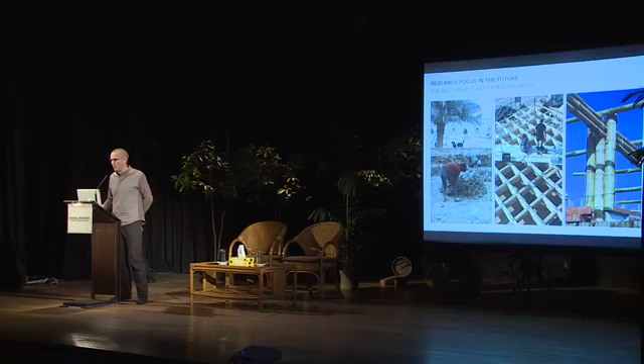These are the three main materials we think natural building is based on. I think half of the world's population lives in buildings linked to earth, built partly or totally out of earth. Bamboo has a big role as well, and in our climate zones in the northern areas, timber also plays a large part. Then we have natural stones and others, but I think the big three are earth, timber and bamboo, and that is our main research and building focus.

The office is doing quite a lot of research work. If you have questions on that, Andrea is here, she's doing our research department. The first project she came into the office with is the H-House project.

It's Healthy House, designed as part of a bigger consortium doing many things. We designed especially inside walls which are vapor active, conditioning spaces and reducing building technology or mechanical systems, especially in Germany. We are increasing efficiency through insulation and air tightness, and in parallel increasing mechanical systems, which causes other problems again. So we try to reduce these technologies based on a transformed building tradition out of natural materials in Europe.

The second ongoing project is Building from Waste. It's also a big consortium where we're working on concrete and other aspects. Our main focus is the design for the consortium, but also two materials: timber and earth products. The earth products come from concrete, earth, sand, but also mineral-based materials from concrete recycling.

A very big aspect is how to reuse timber, which unfortunately still goes to waste and gets burned in Germany at the moment. Our focus is to reuse timber from reconstruction or changes of buildings, bring these materials into factories, produce new elements, and then bring that into what we could call a circular building.

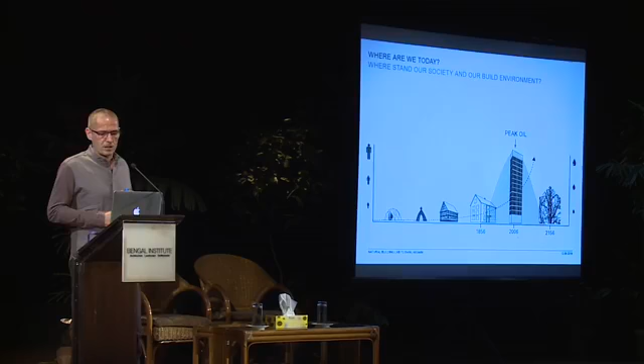Now we have this huge fossil footprint running our systems and building our structures, and that's the struggle we are in. The resources are going down, for example oil, but also sand, and world population still grows, so we have to look for something that's a future option for us. We see huge potential in materials out of nature.

If you think that's quite dramatic, look at peak oil and CO2 emissions. In 1945, what we should call the hour zero after the Second World War in Europe, emissions were quite low. In 1972 the Club of Rome published their book, The Limits to Growth, and everything was known at that point.

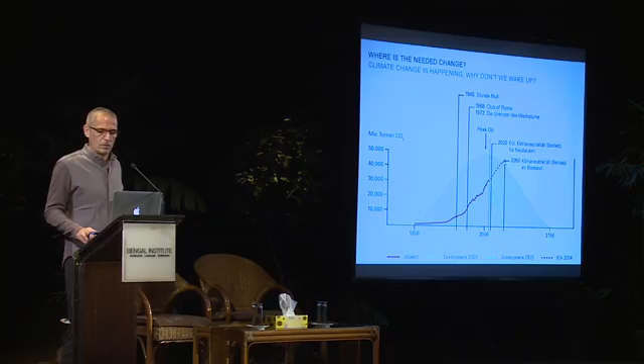Most of you had never even been thought of yet on the planet - I was born a year later. But we knew everything at that point, and still carbon emissions and use of fossil resources kept increasing a lot. Now we don't know how to reach climate goals for 2050 or sustainable global goals in the coming decades. We have to be very quick, because you can feel climate change extremely here in Bangladesh and other countries. It's a drama, and we're still increasing and increasing.

What's nice is what we can learn, but we also learn from abroad. This is a nice oasis in Morocco, but it could also be Rudrapur, because those people live very close to the environment, and we can learn a lot from those communities. If we make a link to what I think is a better life, between those different ends of society, I think we can learn a lot from both sides, and if we start negotiation in between, that's a huge potential.

I like this way of simple thinking and straight-ahead interaction, and that's still what we believe, especially in Europe - we'll just put some green on things and add more power. But I'm sure we won't be able to drive around 10 billion people with those vehicles, and they won't have 100 or 200 grams of meat every day, because that's not affordable on the planet. I think we need a major change in our behavior - how we live, how we build, how we consume - and there's huge potential to be a happy society if we make that change.

Still, I think we're living this way, getting fatter and fatter, while refugees come from other countries at the moment into our culture, and I think we need to find a way in between these things. Just one very simple technical topic - we are architects and engineers, and we have quite a technical focus in our projects. That's the main knowledge we base our designs and construction systems on - an experience from the hot climate.

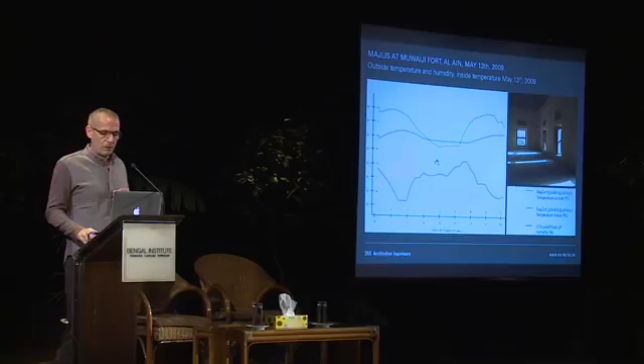In our cases, which I will present soon, we can condition spaces in relation to humidity. Humidity is a big topic because we are running our buildings with more and more technical systems. In Europe, we have the problem that we are drying down our houses in wintertime. There was quite relevant research done in the 80s showing that humankind should live in a humidity level between 40 and 60 percent.

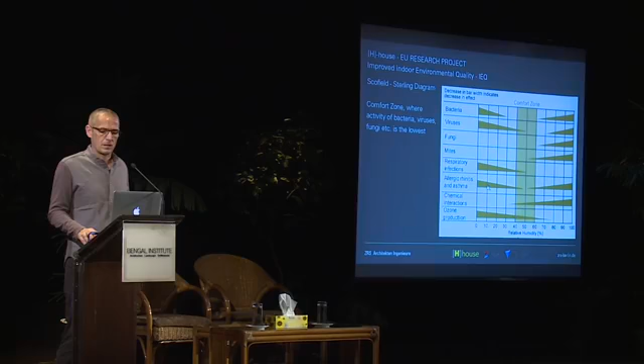Also bacteria, fungus, and other things start growing if the air is too dry. So we need to bring our buildings into a good climate condition between 40 and 60 percent. We measured through our buildings and also historic buildings that earth and timber can condition spaces around 40, between 40 and 60% relative humidity level.

So we designed, based on the research of H-House and others, a building system without ventilation systems, which is very stable in humidity throughout the year and gives very good, healthy comfort. That's based on traditional knowledge, like earth, timber, wood fiber - all these materials have the same behavior. We are adapting these traditional materials, transforming them into a new building system, and have a modern contemporary building.

That's what I'd like to show on that old barn. That barn is nowadays owned by Emanuel Heringer, the cousin of Anna. And he has been working with us in Rudrapur.

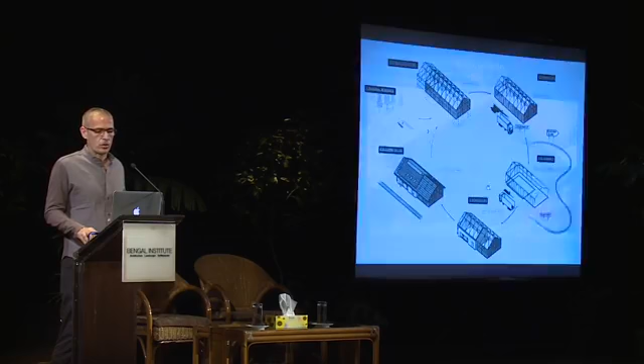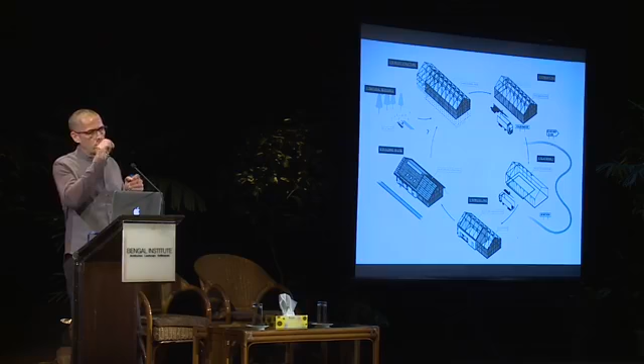In 1810 the beams were cut, so the structure was built 200 years ago. From the signatures of the carpenters we could see that this building had already had 3 lives and had been standing in 3 locations. And now it should be burned. So he took it out of this fossil and consume cycle, and I think it will last hundreds of years again.

So we brought it to another location and integrated our healthy earth timber structure building system, like a healthy house, quite linked to this traditional way.

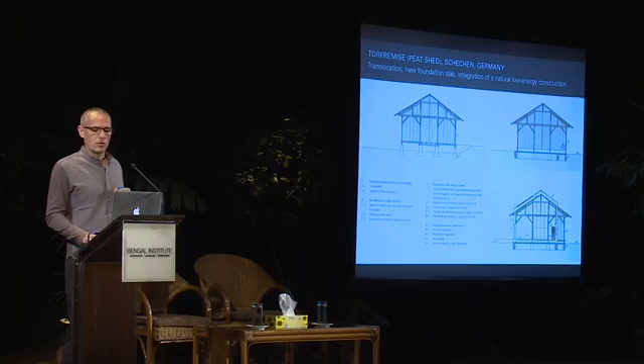What we don't need for this is ventilation - it's an airtight, high energy efficient, very well insulated, very comfortable building. We don't need a ventilation system because the walls control the humidity level inside very properly. From the construction side you can see here how nicely integrated, based on craftswork, the new timber structure is into this old barn, in the same manner as the historic building showed us.

Then we integrated earth blocks, earth plasters, wall heating, and in that case we don't need cooling - a wall heating system gives a good, comfortable heating system in that old shell. That's how it looks now - that's the flat of Emanuel and Stephanie, all natural surfaces. We have a white earth plaster.

It's a mix of white minerals and white sand, with the same performance as the brown materials. It's an industrial product for sure, developed through design, and Christoph, my partner, is involved in this kind of material development.

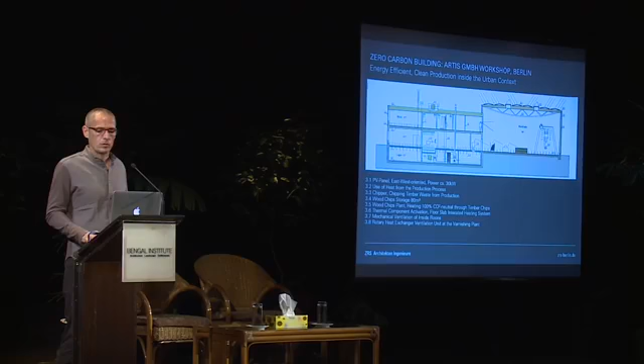So we introduced the same kind of technology, a highly insulated natural building shell, and we're using our waste from production to heat up the building. It's a kind of plus-energy building on the heating level, and we're using photovoltaics, etc., to make it a very green building.

Nowadays, as the building is so efficient, we're sending hot water for heating to the neighbors because we have so much waste and the building is so efficient.

That's how it looks from inside. Amazing teamwork again with these clients. We couldn't say it's our design because it's an integrative design, and all these sketches have been switching from one table to the other. It's quite nice that we got to this very nice result.

That's how clean production can come back, and people can live in the neighborhood and work in the neighborhood. That's, I think, a little bit our vision of a future city.

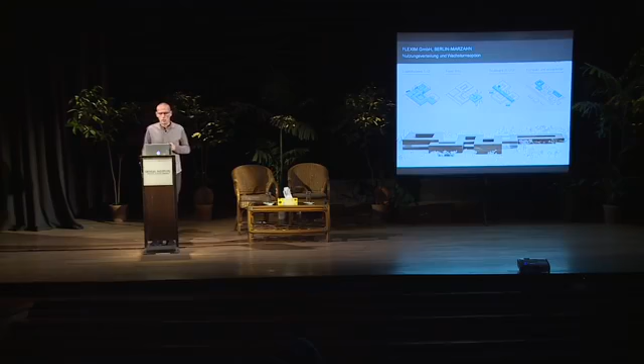Scaling up, it's a huge industrial production hall. We are building 2 of these yards. Actually, the whole plot could be filled up with around 45,000 square meters.

Our first step was to build 15,000 square meters for research, training, production, logistics, etc. It's a quite complex building with a very simple structural idea. We have a skeleton structure and a very flexible use space, so you can fit in every function into that structure.

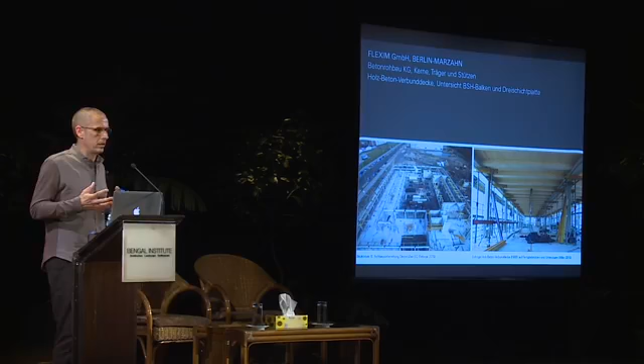The idea is to build the first 3 floors with a concrete structure, a hybrid structure. I think that's also something we'll be going through for the next decades, thinking about what's possible, to introduce as much natural material as possible.

This building could have been done completely in timber, but cost-wise, we decided at the end to have these vertical elements and beams in concrete, which is also quite aesthetic, and the ceilings in timber.

The whole cost of the project is around 20 million euros, and the additional cost to switch from concrete to this timber ceiling was around 200,000. So the client decided to have this nice ceiling so people feel well in that structure.

He invested a little bit more because he wouldn't like to have these simple, poor gypsum panels under the roof, as he hates this kind of material. So now we have these beautiful timber ceilings and a nice structure.

The whole building shell is in wood for sure, and we did a lot of work together with Professor Hausladen from Munich on climate design.

So we tried night cross ventilation with special items, to make it a low-tech and comfortable building.

What's quite interesting is that we're using wastewater. We have a collector inside the channel, and we're pumping through a heat pump system to extract heat from that wastewater to heat up the building, using wastewater from the neighborhood. So that's how it looks.

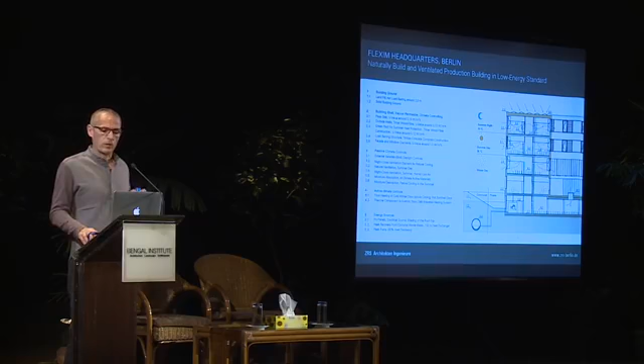That's the fourth floor, completely in timber, and all the other floors are in timber and concrete, as you can see here. That's a boulevard connecting all the yards and is the main backbone of the building.

That's how it looks when the production moves in. So that's a new factory, and I think that's how deep thinking, designing, and working integratively with the client again, you can reach these kinds of things.

I like this kind of quality of building, and I think this is a good step into the future and quite innovative also for Europe.

So that's from outside here. You can see these night cross openings. That's rain protection, and it can be opened the whole night.

Similar things we're doing in our schools, for example in Pakistan, I will show later on. So it's quite similar how that low-tech approach works in different climates.

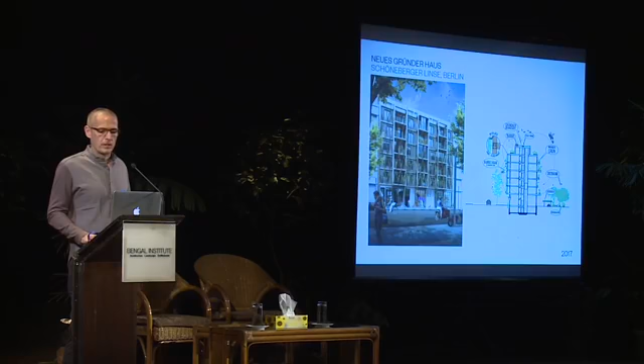Our vision is now to make a complete natural structure for housing, 7 stories, elevator shafts, everything in timber as a low-tech building with breathing materials. We just have a concrete slab against the earth, and then the whole structure could be in timber. And we were thinking about biodiversity, rainwater, etc.

Our vision is to have a regrowing city based on natural resources. We have a network established, what we call die nachwachsende Stadt, which translates to the regrowing city based on natural resources. We are trying to link up with different architects, doing conferences and trying to do research as well in that network.

Our vision would be a mixed city, working and living together in walkable distance. So 5 stories would be something we would accept, or 4 stories for housing, and on top a layer of maybe 1 or 2 stories of production or other uses on the ground floor.

So we are moving now out of Europe. That's a renovation project, a rehabilitation project of Jahili Fort in Abu Dhabi and Al Ain. It's a nice oasis city. The request was to renovate the structure, and we got the contract early on. The Aga Khan Award was a big support to get that contract.

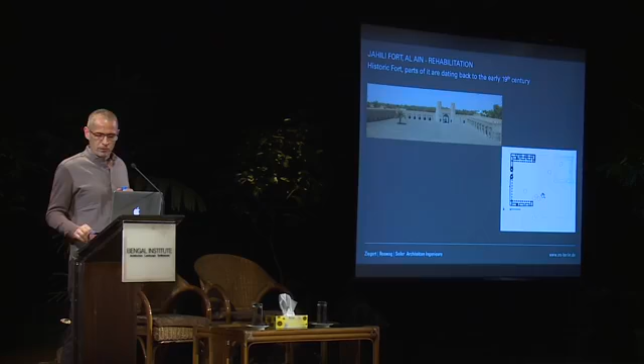2017. So that's how it was looking through the construction time. We had to treat all the timber elements, which in that case were palm trunks. We treated them here in the background. We stored all the earth blocks, so it's an earth block or adobe building. We soaked all the mortars, and then brought in completely all the materials.

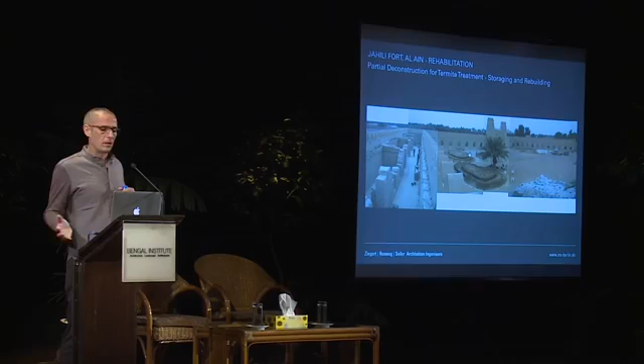Up to the final layer of plaster, flooring, and roofing, we used original materials. And that's also showing how earth could be a circular material for the future.

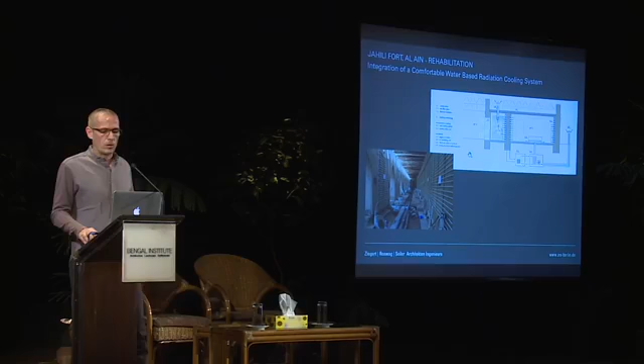So we applied an intelligent wall cooling system, water-based, very efficient and comfortable. And we brought in very sensitive, high quality craftsmanship through Hunnarshala Foundation from India, friends of ours. We've been working together for 10, 11 years now.

They did all the training and craftsmanship for this high quality of renders, but that's the original material. We brought a wax onto the floor, so it looks like marble and it's quite resistant.

But we didn't try to change the design, because that's the first rehabilitation of this kind for an earth building in Abu Dhabi. So we tried to stay as close as possible to the original, and we introduced this nice exhibition on Wilfred Thesiger in these exhibition cabins with a nice gray render. That's a new item, but I think quite similar to the tradition, and from outside you don't see anything.

That's the work we are working on at the moment, in Abu Dhabi city. Qasr Al Hosn, again a renovation project. For 11 years we've been working in the region, up to Afghanistan and other countries, in rehabilitation of earthen and other natural-based buildings.

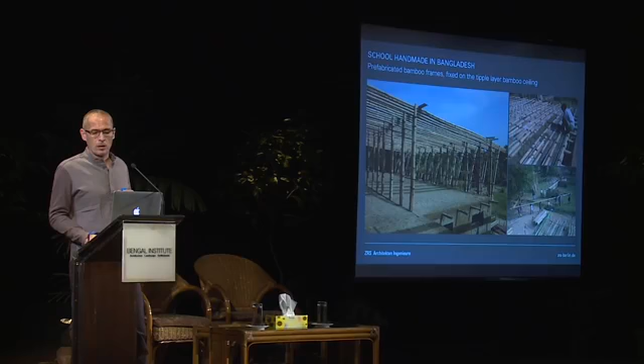So in parallel to the earthworks, we were producing 25 of these beams. We then started to fill the ceiling with earth, so there's an earth floor on the first floor as well. Then we installed all that, and we were producing facade elements in parallel.

And that's, I think, an amazing photo, but that's how it happened. I didn't have any other connection at that time, very rare mobile connection. There were no other projects in work, so we did everything on site - carpenters, everybody was sitting on the site, and we could discuss and develop every detail of the building on site. It was quite amazing to work with the craftsmanship in that behavior, developing a rough detail that fits the conditions of the materials and construction methods.

And that's the inside ground floor classrooms - we have 3 of them, plus one of the big ones and a small classroom in the upper floor in that bamboo structure.

In the ground floor we have these nice caves where these kids can play individually or work individually, for this Modern Education Training Institute, for the first 4 classes. We designed it in a way for those kids through their teaching philosophy, but also through the hands of the people. It's quite interesting to have this kind of approach, straight ahead from ground, from scratch, from resources, let's say.

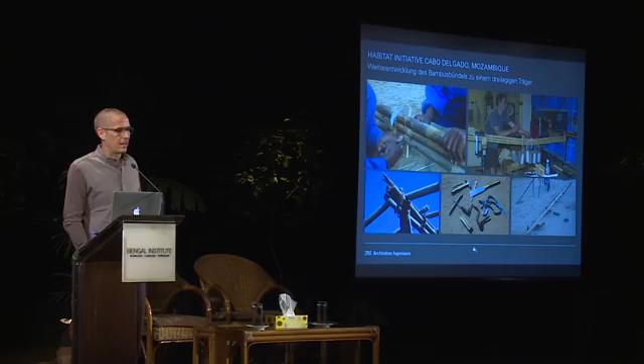That's quite nice if you're working together with your own civil engineers. Here you can see again this testing of this beam, that's actually what Emmanuel produced in his workshop when we've been there before starting the design. That's a set of tools you need to build up this bamboo structure - that's what I also tell my students: get a nice hammer, a nice saw, maybe a little drill, and that's it. Then you can go and build very nice structures and design well, and do it with your own hands. That's the approach of our design build workshops.

We built another project as a sister school based on the same building system in Pakistan near Lahore. We made a schedule of questions which we handed over to the client who did the research in the field. He came back with a lot of information, and we designed based on his information, and things we could find in literature and on the internet about climate. We designed, in the same manner, a proper foundation, thick earth walls, and the bamboo ceiling.

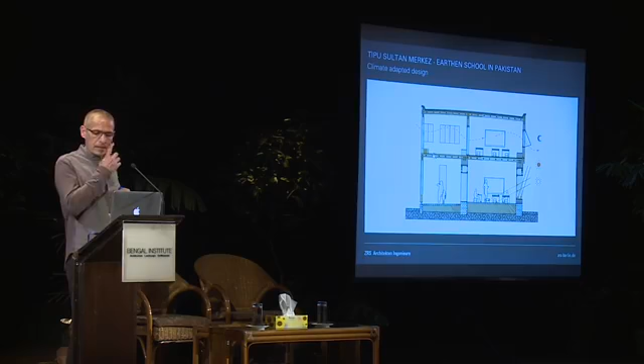But in this case we had a flat roof area because they have a very arid, dry season. So we brought in the ceiling system on another layer, and we have a flat roof with a bitumen belt as a roofing system. As we have a cold winter and a hot summer, we did massive fill-ups of the bamboo walls in the upper floor. The intention was to build, based on that system, a nice villa for a rich person in Lahore, bringing in nice textiles and maybe nice flooring in timber or whatever.

It could look the same as the house of Emmanuel and Stephanie in Bavaria - it's just the raw construction in the background, and that's what makes these things quite familiar, and what we should introduce into a wider society. That's how it looks from outside. Unfortunately, we have just built half of it, and the second phase did not happen up to now, but hopefully in a few years we will also install 4 more classrooms.

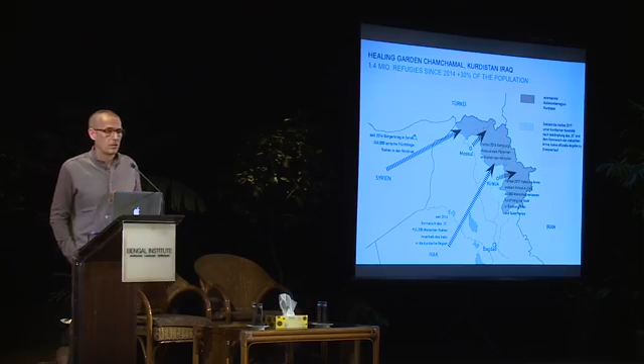I think that's the final project I would show - it's Iraq, a trauma therapy center in Kurdistan, Iraq, the northern Iraq, affected through this war crisis with ISIS. You can still see here in the map of 2016, and that was exactly the time when we started working there. I think since 2014, at that time 2016, they already had 1.4 million refugees coming to that small piece of land, with a lot of people with a lot of traumas.

We got in contact through a nice person - she is supporting our work in some ways, and she brought us together with Jiyan Foundation. They are working in Kurdistan with around 200 therapists working in the camps. The vision of this organization is to have a nice healing garden where they also can install training for teachers, a clinic for people who have very hard trauma which should be there for a longer period, and to do all that based on a traditional manner - using animal-based therapy, traditional animal kinds, using traditional plants, and also building based on their own building tradition.

So the location is here. These are camps which Saddam Hussein installed in the 1980s. He bombed out all the Kurds in the mountains, in the villages, with phosphor bombs, and brought together whoever kept alive into that kind of military camps. That's the location where they still live, and they have these huge corridors for military control of these systems - these are kind of more informal settlements now.